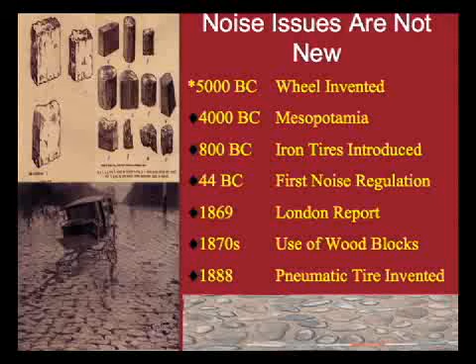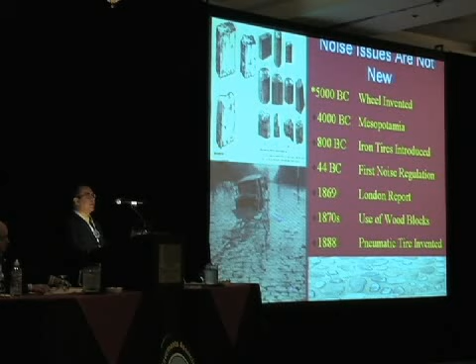The very first pneumatic tires were invented in 1888, and in the early 1900s, with the advent of automobiles and rubber tires, it appeared that we somehow took care of the noise and it went away. But as more and more cars and automobiles came, and we built more highways, more and more noise got generated, and this problem came back to us again. So we're going back to the very same issue that we thought we solved.

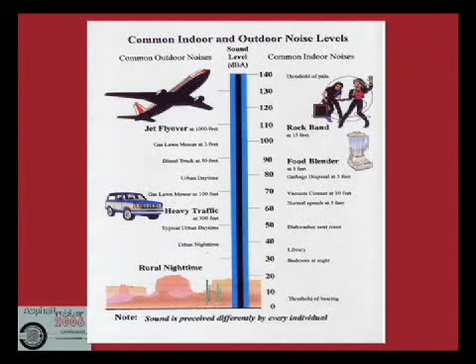This is a typical indoor-outdoor noise chart. The typical unit of measurement for noise is the decibel level. Typically 30 to 40 decibels is considered a quiet, tranquil setting. Anything above that, from 50 to 60, would be considered a noisy environment. Typical highway noise is in the 60 to 90 range, and the threshold of pain is at 140 decibels. These are some of the indoor and outdoor noise decibel levels.

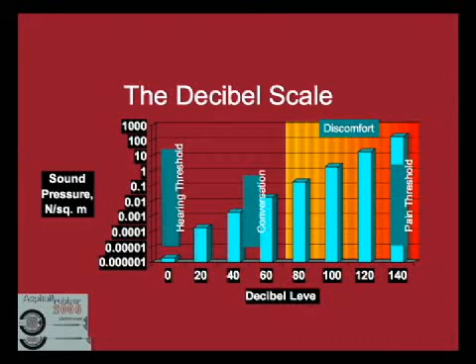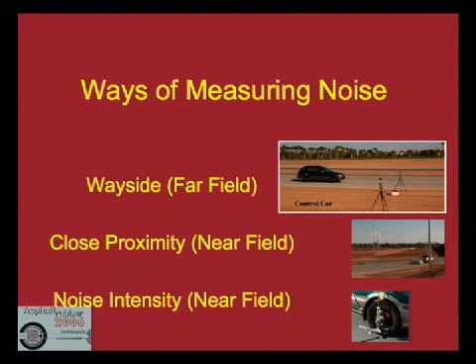There are 2 other noise measurements. One is called close proximity, near-field measurement, where the noise is measured very close to the tire and pavement. The other one is noise intensity. Both of these are more research-oriented. The trailer or close proximity method costs about $40,000 to $50,000, and the noise intensity method is $60,000 and up.

This is a close-up of the ADOT ISO CPX trailer noise measurement setup. And this is the noise intensity measurement.

This other noise measurement uses two probes mounted on a tire, which ADOT has adopted from Caltrans and GM. There are two probes, and each probe has two microphones, so altogether there are 4 microphones mounted on the tire that measure the noise in one pass versus two passes. So we've tweaked this noise intensity method a bit.

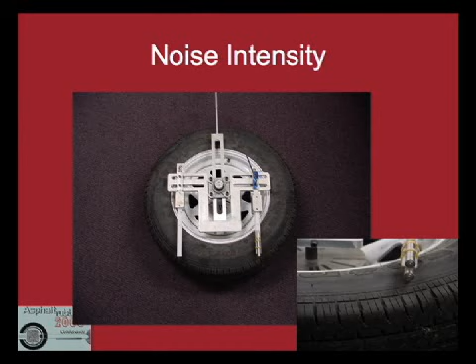The wayside noise measurement indicates that if a person is 50 feet away from the source of the noise, that would produce a noise of 67 decibels, and this is how it sounds.

Now, if we somehow change the surface of the pavement, and that reduces the noise by even only 3 decibels, this is how it would sound.

That is a huge difference. Only a reduction of 3 decibels is as if we have moved the noise source from 50 to 100 feet. So in a sense, a reduction of 3 decibels means that we have doubled the distance from the source of the noise, away to 100 feet.

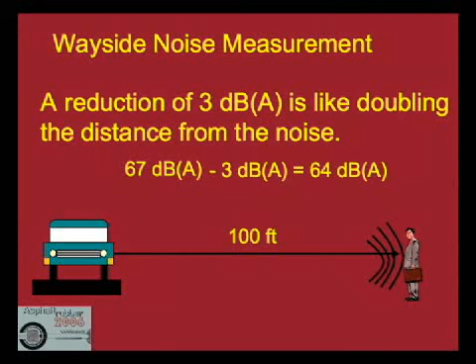Another rule of thumb is typically 1 decibel in noise reduction is like 2 feet of wall height. As we know, one of the ways of measuring noise mitigation is sound walls and berms. Sound walls and berms are effective in some ways, but they are very expensive.

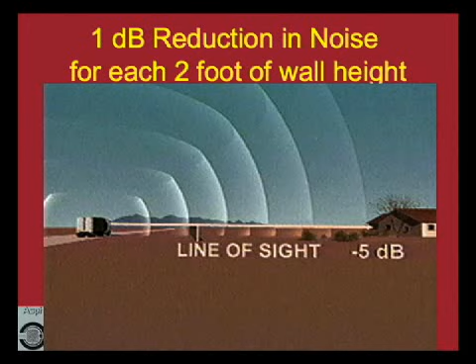In some applications, they are not really effective, because in order to be effective, we need to have the line of sight broken. In other words, we have to have an obstruction. In a lot of situations, the house could be up above on a hill, so the sound wall is not only expensive, in some cases it could be not effective at all because we're dealing with a situation where we need the line of sight to be broken in order to be effective. So sometimes it cannot be effective even with the most expensive sound wall.

In highway noise, there are 3 sources of noise generated: the exhaust tailpipe, the engine, and the tire pavement noise. For the most part, exhaust and engine noise are controlled by auto engineers at the source, through muffling or dampening. But the main source of most highway noise is generated at the tire pavement interface, and that comprises about 70% or more of the noise on highways.

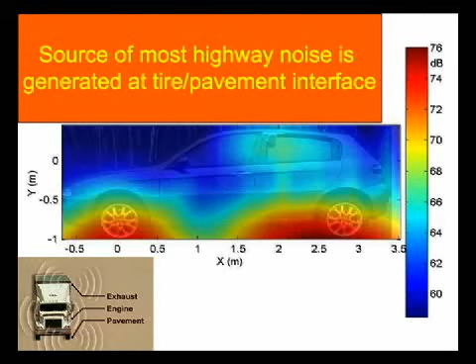At 35 miles per hour, that's where tire pavement noise dominates. On a typical freeway at speeds of 50 miles per hour or more, that comprises 75% or more of the highway noise generated at the tire pavement interface. So it's a huge contribution of noise through the tire pavement interface.

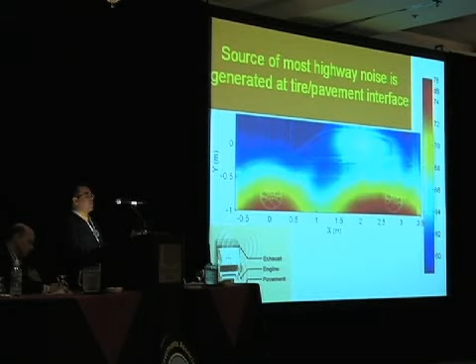ADOT has done some measurement through the CPX trailer noise at the tire pavement interface, and also at 15-meter wayside. These are some typical numbers and measurements. For a random transverse tined concrete, the tire pavement CPX is 104.9 decibels. For transverse tined concrete it's 102.5. For longitudinally tined it's 99.1.

For whisper grind, which is the quietest concrete, it's 95.5. And for AR rubberized friction course it's 91.8. As you can see, there's a huge difference from 91.8, the rubberized friction course, versus the loudest random transverse tine, which is 104.9.

By the same token, if we take noise measurement at the wayside, the same kind of pattern exists. At wayside measurement, it's 81.1 for random, 78.7 for transverse, 75.3 for longitudinal, 71.7 for whisper grind, and again for ARFC it's 68. So it's a huge difference in decibels in both CPX noise measurements and wayside noise measurements.

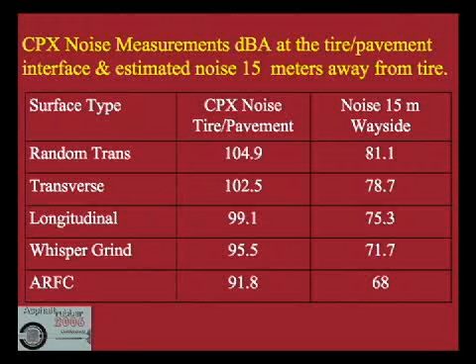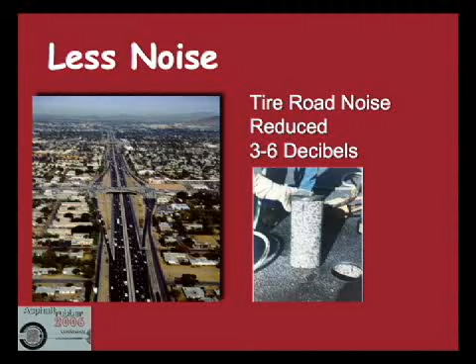This is a typical example in downtown Phoenix, on I-17, where we placed 1 inch of ARFC. As you can see from the pictures, the core taken is about 14 to 15 inches of concrete. We placed 1 inch of asphalt rubber open graded friction course, and we noticed a decibel reduction of 3 to 6 decibels.

The next project we did was US 60 for ADOT, a 10-mile segment of freeway that we did in 2000, 2001. The intent was to widen the freeway from the existing 3-lane PCCP in each direction to 6-lane in each direction. It was a 10-mile segment that included bridges, widening, and sound walls.

As a last surface, we placed a 1 inch, or 25 millimeter, ARFC friction course on the surface. The idea at the time was that placing ARFC would improve the skid resistance, improve the ride quality, and provide a very sharp contrast for striping. The noise reduction was really one of the side benefits that we thought of at the time.

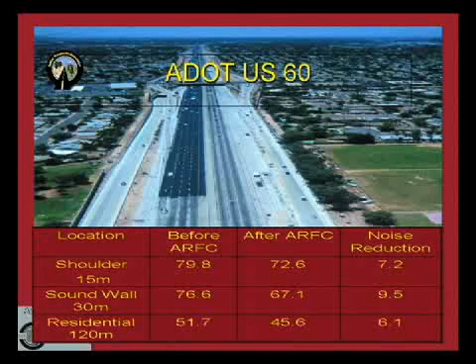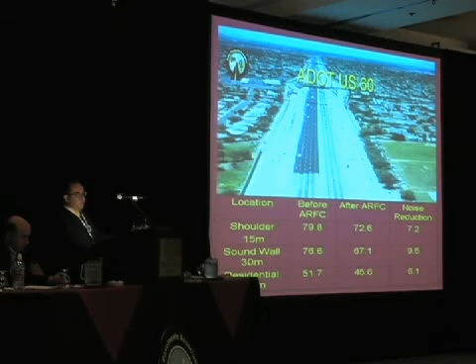When we took wayside noise measurements at different locations, at the shoulder, at the sound wall, and in the residential area, this is the before and after. Before we placed the ARFC on concrete, we measured 79.8, 76.6, and 51.7. After we placed the 1 inch overlay on concrete, the decibel definitely dropped to 72.6, 67.1, and 45.6. As you can see, that was a noise reduction of 7.2, 9.5, and 6.1 decibel credit or reduction that we got.

And that led us to a quiet pavement program that I'm going to talk about in the next few slides.

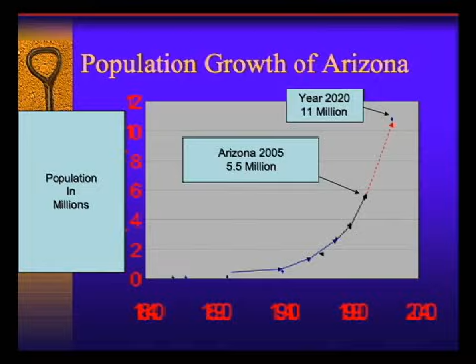Because of the population growth and the huge increase in traffic and noise, we had to do something about it. As a result of a previous project on US 60, placing 1-inch AR-ACFC on the concrete brought huge success, because it caused citizens in the neighborhood to notice the quietness of the freeways. They petitioned our governor at the time, and we came up with the Quiet Pavement Program in 2003.

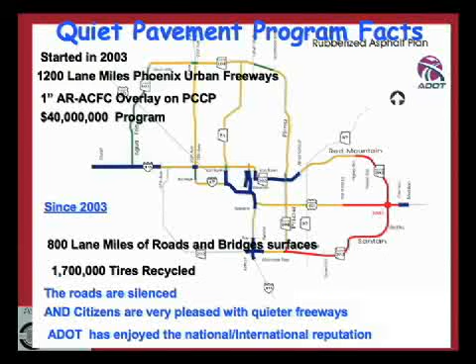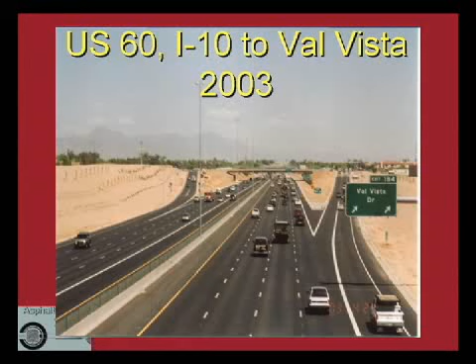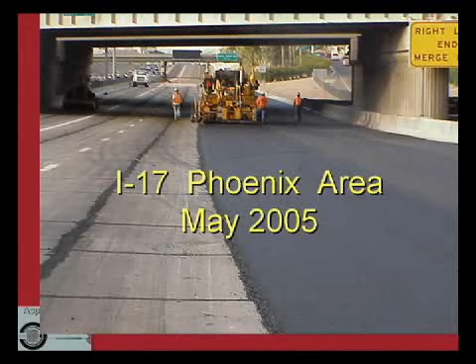These are some subsequent freeway projects we did after that. This is Loop 101 in the Scottsdale area. This is Interstate 17 in the Phoenix Metro area, from May 2005. And the most recent one is from just last week - this is I-10, the Phoenix to LA freeway, which has huge truck traffic in excess of 150,000 ADT daily.

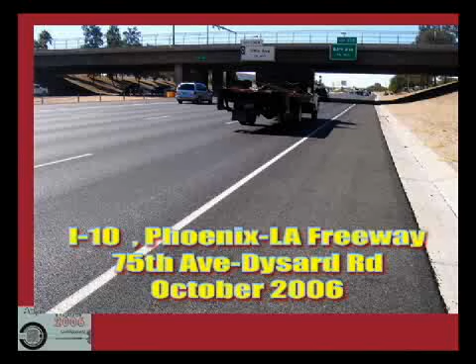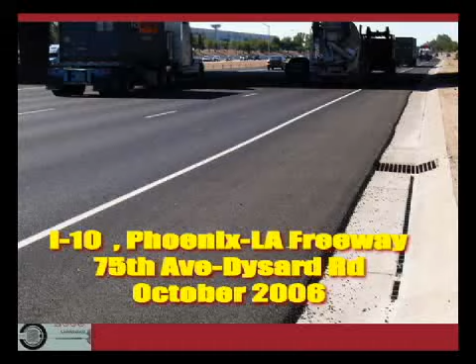As you can see, 1-inch of overlay on top of concrete makes it very quiet. The residents really love this product. These are some other pictures of the freeway - I-10, Phoenix to LA freeway, 75th Avenue to Dysart, from just last week.

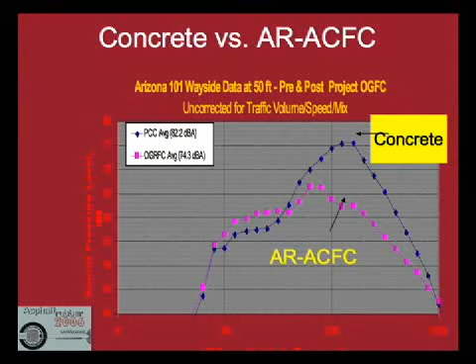The noise in that range is very sensitive - the hearing in this range is very irritating to human ears, and that's the tonal spike you can see, concrete versus AR-ACFC. Not only is AR-ACFC quieter, but in this range it also causes less irritation to the ears.

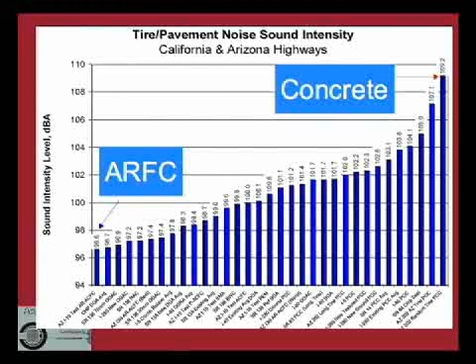This is a combination of California and Arizona highways showing noise intensity. As you can see, different surfaces of AR-ACFC versus concrete show a huge decrease in decibels between the two surfaces. This is a comparison of the same previous slide in a table format - again, a big decrease.

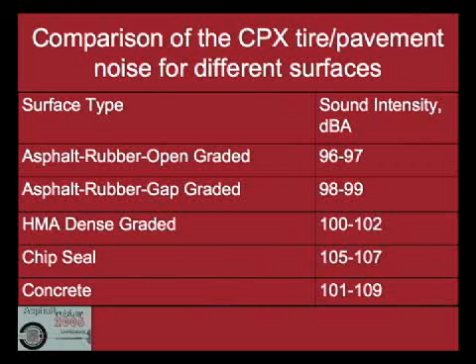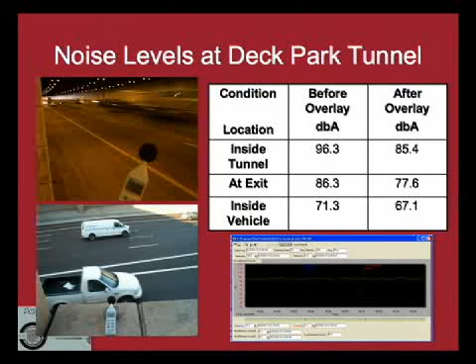This slide shows the noise level at Deck Park Tunnel that Dr. Kamil Kaloush talked about on Wednesday - that was his tire wear emission presentation. But this also shows that when the noise meter was placed inside the tunnel, at the exit, and inside the vehicle, there's a huge difference before and after the AR-ACFC overlay. I'd also like to show you this noise meter slide.